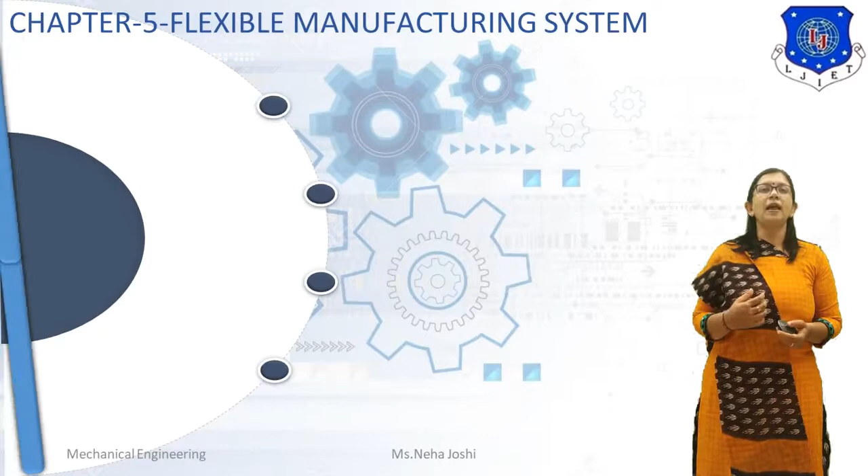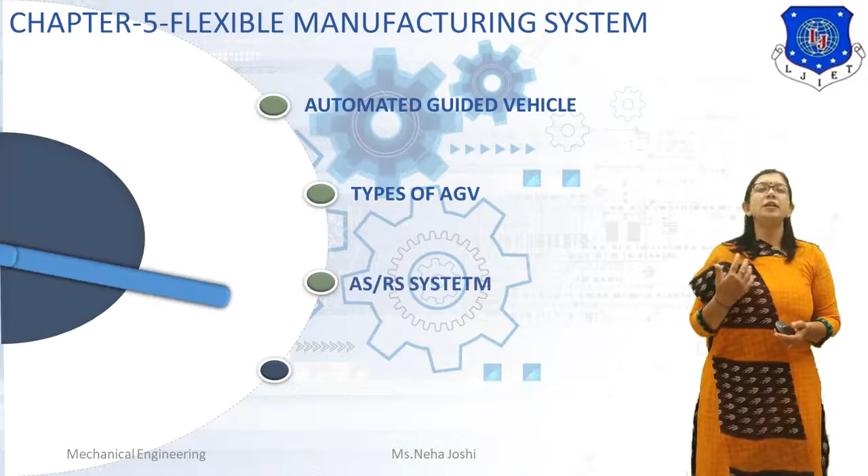Let's start our fifth chapter, that is Flexible Manufacturing System. In previous session, we covered different topics like advantages of flexible manufacturing system, limitation of flexible manufacturing system, then application of flexible manufacturing system, and workpiece handling in flexible manufacturing system. In today's session, we will cover different topics like automated guided vehicles, then types of automated guided vehicles, then ASRS system, which is known as automated storage and retrieval system, and advantages and limitation of ASRS system.

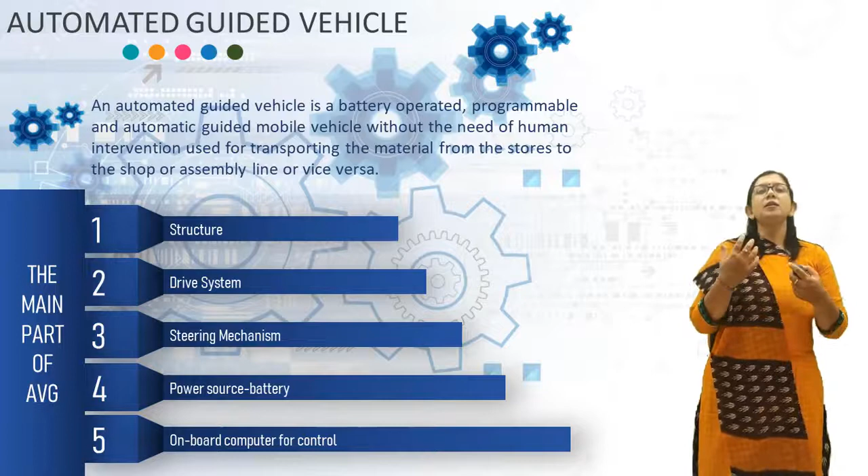Now student, first of all, what is automated guided vehicle? An automated guided vehicle is a battery operated programmable and automated guided mobile vehicle without the need of human intervention, used for transporting material from store to the shop or assembly line or vice versa. Such vehicles are equipped with an automatic guidance equipment, either electromagnetic or optical, and are capable of following the prescribed guide path and stop at location as per programming without the help of driver or an operator.

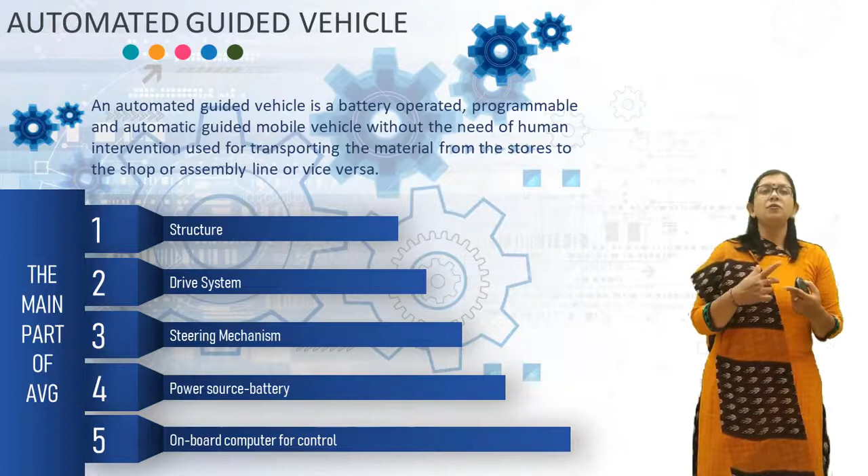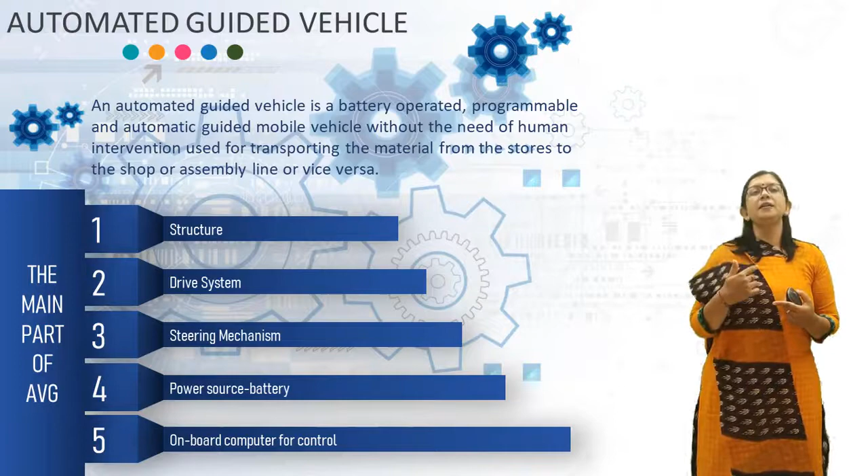Main parts of the automated guided vehicles are: first one is structure, second part is drive system, third part is steering mechanism, then power source battery, and last part is on-board computer for the control. Now here you can see how different kinds of automated guided vehicle transfer the material on shop floor. So this is the working of automated guided vehicle. There are several kinds of automated guided vehicles used in flexible manufacturing system.

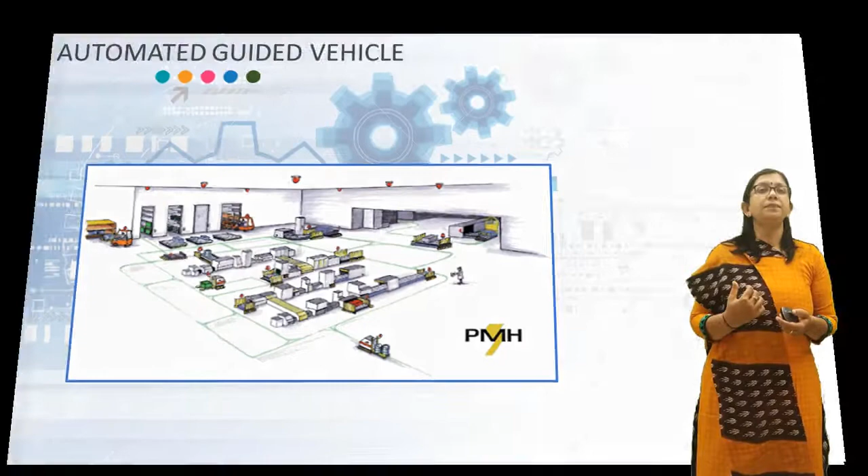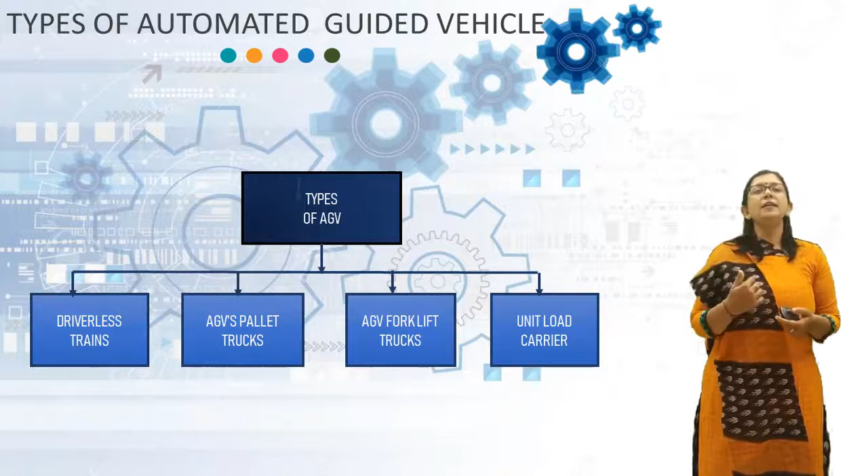Now we will discuss types of automated guided vehicles. There are four types of automated guided vehicles. First one is driverless train. The second one is AGV pallet truck. Third one is AGV forklift truck, and the last one is unit load carrier.

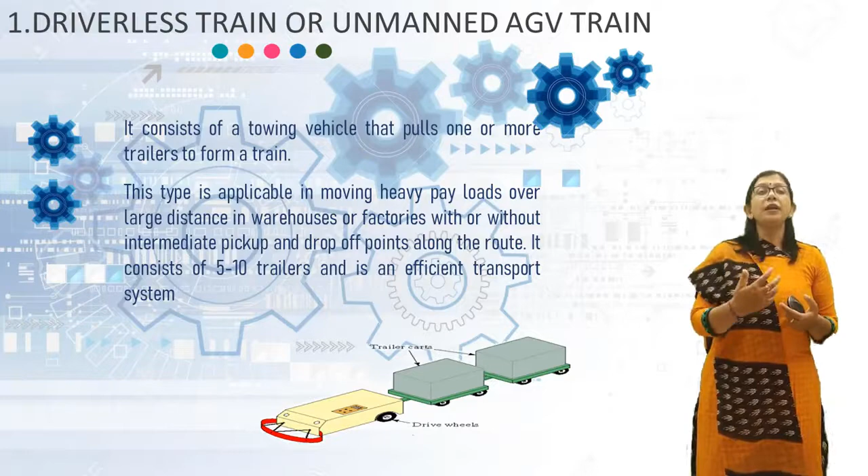Now first of all we will discuss about driverless or unmanned AGV train. It consists of a towing vehicle that pulls one or more trailers to form a train. This type is applicable in moving heavy payloads over a large distance in warehouses or factories with or without intermediate pickup and drop off points along the route. It consists of 5 to 10 trailers and is an efficient transport system.

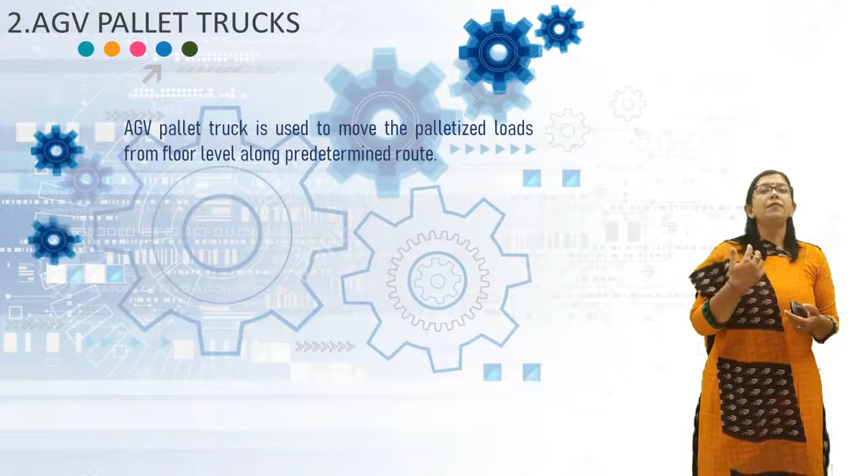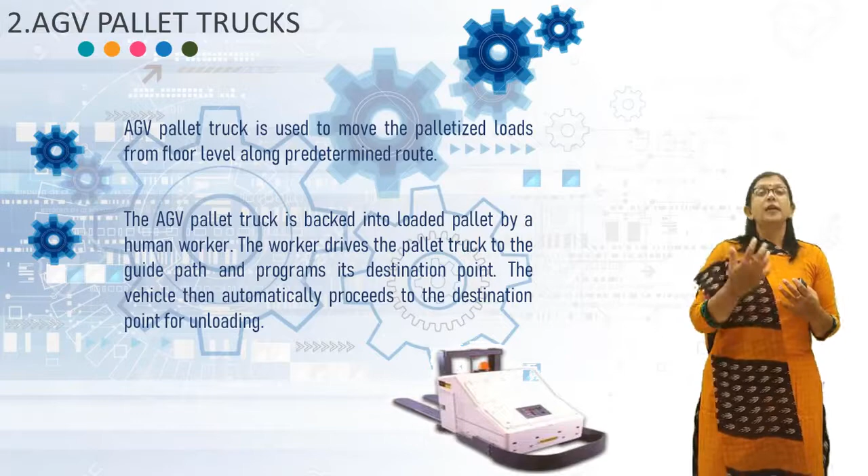Now second one is AGV pallet trucks. AGV pallet truck is used to move the palletized load from floor level along a predetermined route, as you can see in this diagram. The AGV pallet truck is backed into a loaded pallet by a human worker. The worker drives the pallet truck to the guide path and programs its destination point. The vehicle then automatically proceeds to the destination point for unloading. The capacity of AGV pallet truck ranges up to several tons.

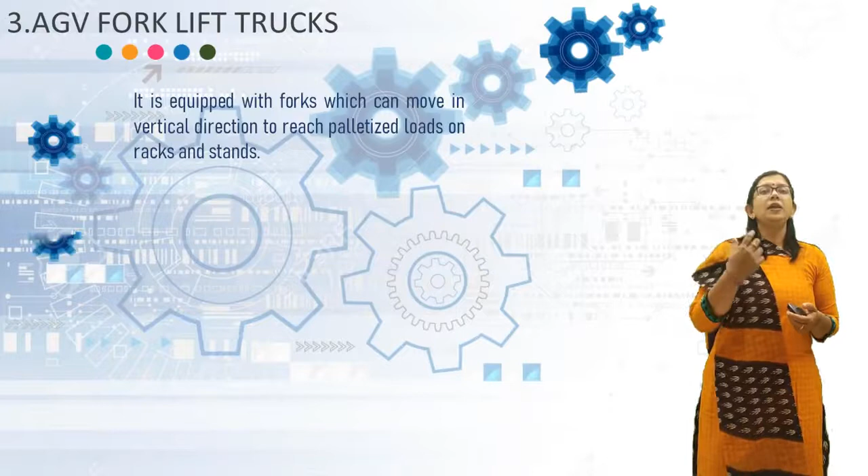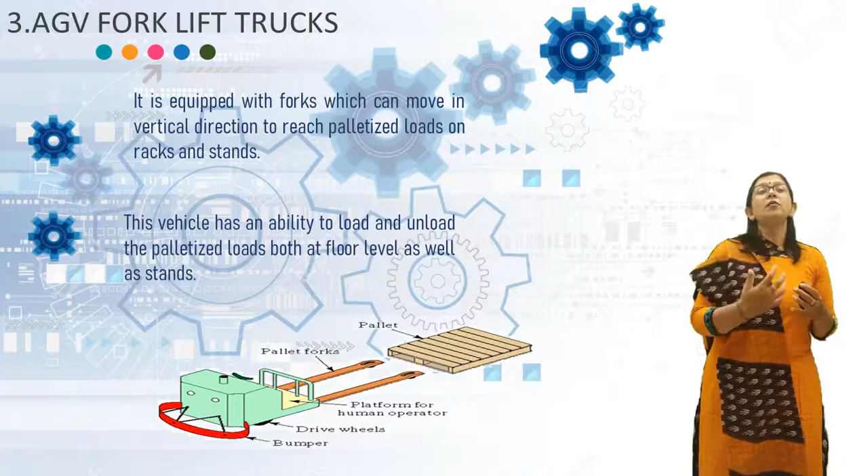The third type is AGV forklift. It is equipped with the fork which can move in vertical direction to reach the palletized load on racks and stands. This vehicle has an ability to load and unload the palletized load both at the floor level as well as stands. As you can see in the diagram, AGV forklift trucks, how it is used. It can position its fork at any height so that conveyors or load stands of varying height can be accessed easily.

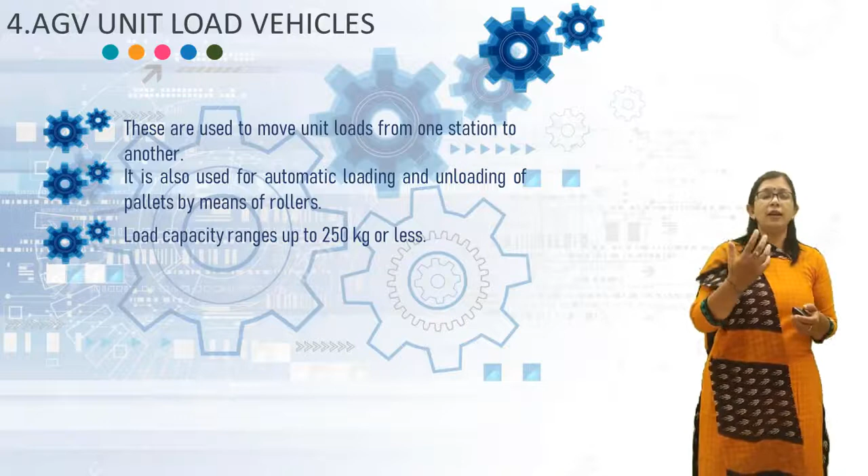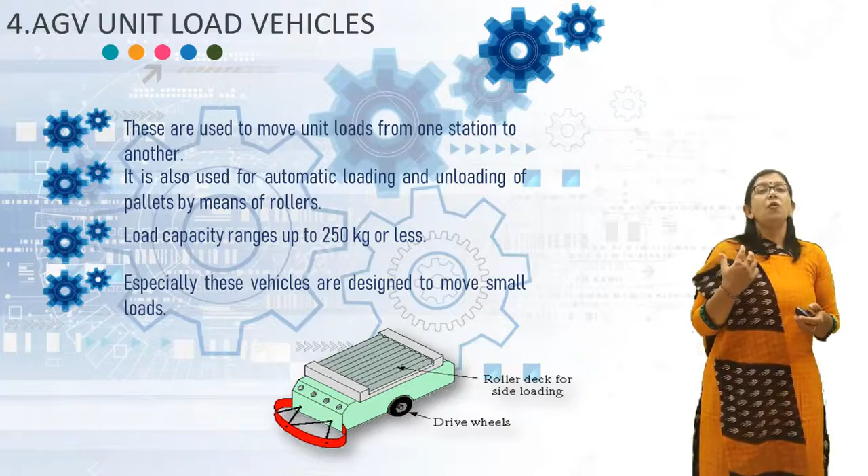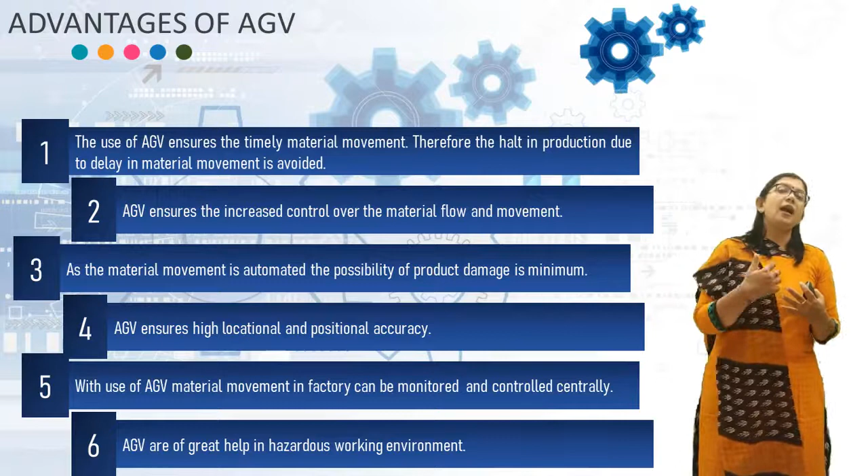Now we will discuss the advantages of automated guided vehicles. The use of AGV ensures timely material movement. Therefore, halt in the production due to the delay in material movement is avoided. The next advantage is AGV ensures increased control over the material flow and movement. As third advantage, as the material movement is automated, the possibility of product damage is minimum. The next advantage is AGV ensures high locational and positional accuracy. With the use of AGV, material movement in the factory can be monitored and controlled centrally. And the last advantage is AGVs are of great help in hazardous working environment.

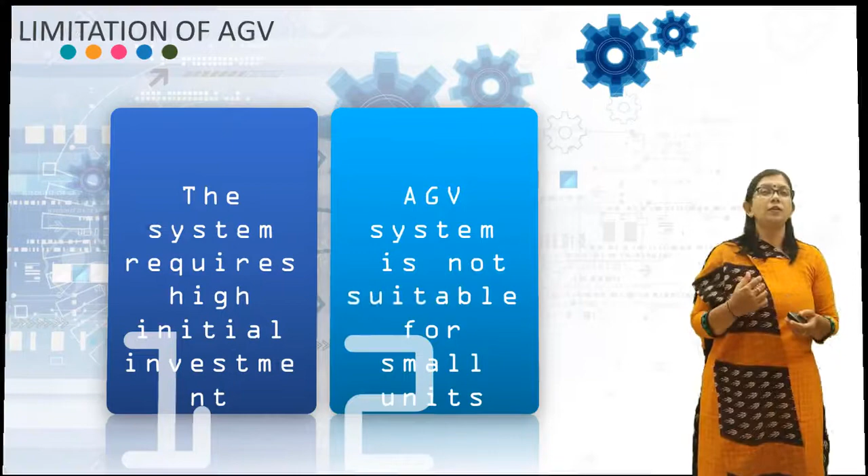Now, what are the limitations of automated guided vehicle? First limitation is the system requires high initial investment. And the next is AGV system is not suitable for small units. Now we will discuss about the ASRS system, which is known as Automated Storage and Retrieval System.

Now in large manufacturing industry, the volume of items and components is so large that it becomes extremely unreliable and time consuming to use a manual storage and retrieval system. Therefore, in such a case, it is advisable to use an automated storage and retrieval system. In an automated factory, as all functions of the factory are integrated and automated, the storage and retrieval system is also automated.

Automated storage and retrieval system can be defined as the computer controlled and automated system that performs the storage and retrieval operations with speed and accuracy. Automated storage and retrieval system can also sometimes be referred to as an automated warehouse. Now, automated storage and retrieval system handles, stores and retrieves the material faster with greater accuracy, safety, efficiency than the manual storage and retrieval system.

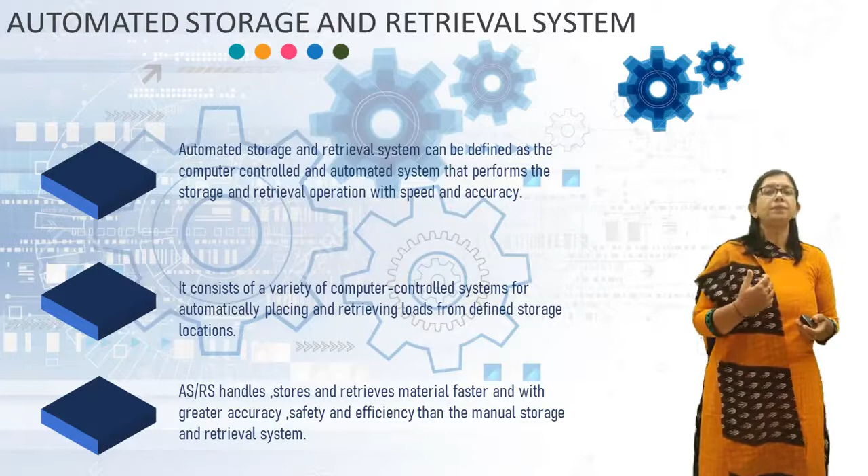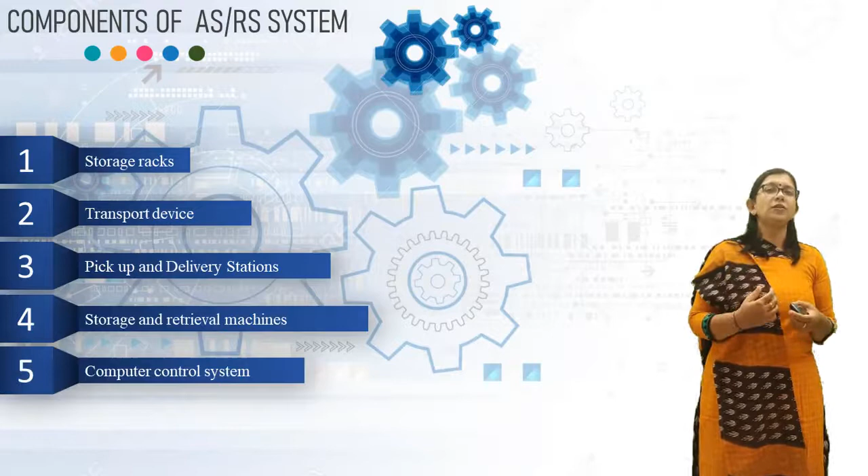Now, what are the components of ASRS system? There are different components which are used in automated storage and retrieval system. First one is storage rack or storage structure. This automated storage and retrieval system contains several rows of storage racks for storing the material items. The storage structure of automated storage and retrieval system is much taller, approximately 30 meters, than that of the conventional storage and retrieval system.

The next component is transport device. Okay. Generally, as a transport device, automated guided vehicles or conveyors are used. The storage structure where the material or items are stored is linked to the shop floor by transport devices like automated guided vehicles or conveyors.

The automated guided vehicles or conveyors are used for transporting the items between the shop floor and the automated storage and retrieval system. The incoming material items are first sorted and loaded to the pallets. The loaded pallets are then passed to the weighing and sizing station to ensure that they are within the load and size limit.

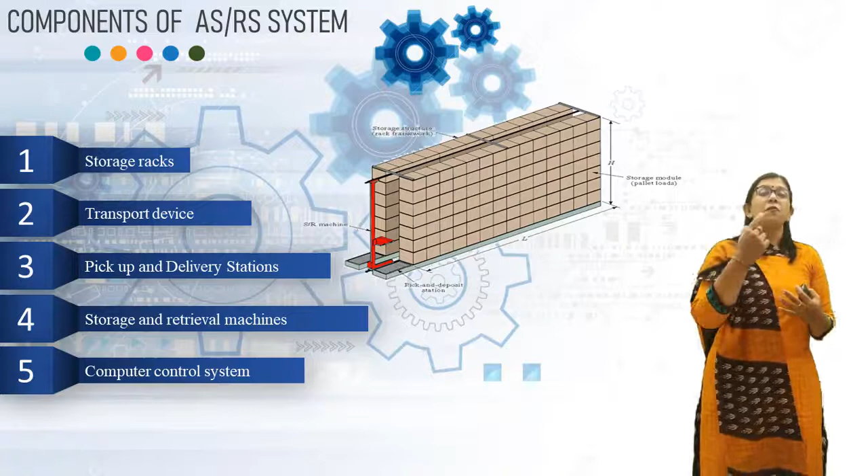And the last component of the ASRS system is the computer control unit. The computer control unit performs two functions. First one is to control the operation of the system, and the second one is to store the material movement and the inventory data. Now here in this diagram you can see how an automated warehouse works in a flexible manufacturing system. You can see the storage and retrieval system, how it works. Okay, then the different components of the automated storage and retrieval system.

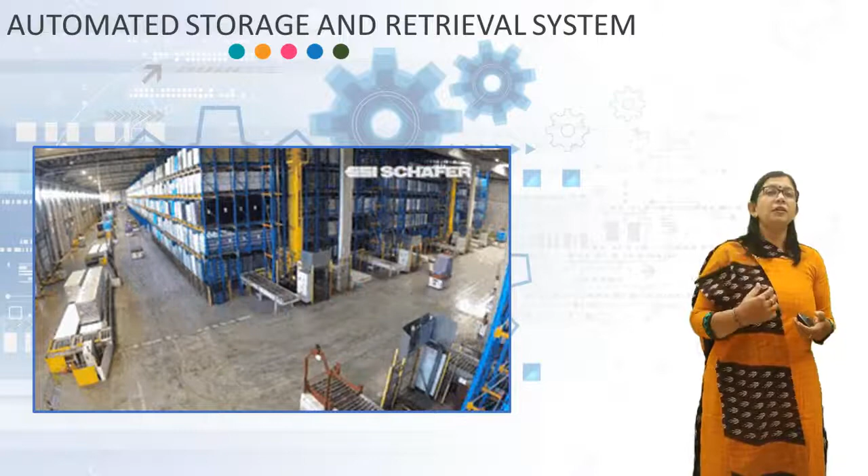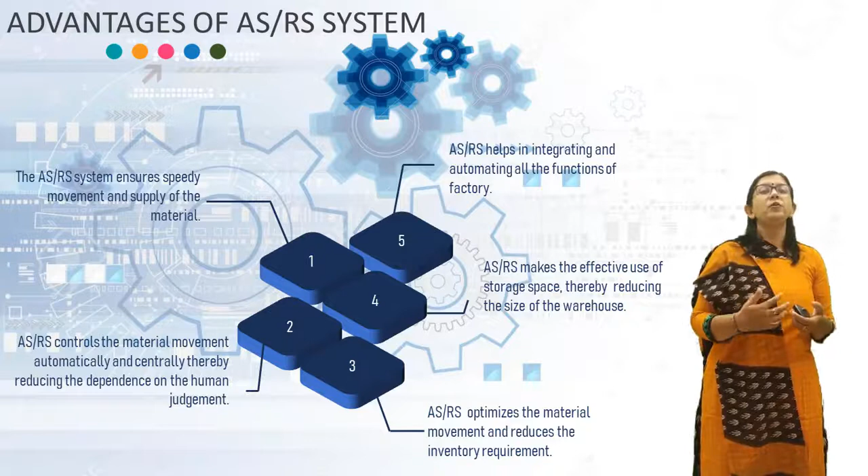Now, what are the advantages of ASRS system? The ASRS system ensures speedy movement and supply of material. The next advantage is ASRS controls the material movement automatically and centrally, thereby reducing the dependence on human judgment. The next advantage is ASRS optimizes the material movement and reduces the inventory requirement. The next advantage is ASRS makes effective use of storage space, thereby reducing the size of the warehouse. And the last advantage is it helps in integrating and automating all the functions of the factory.

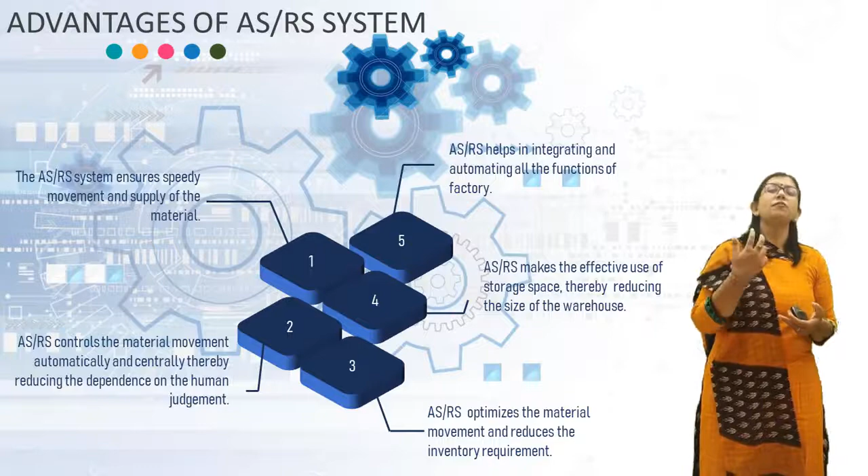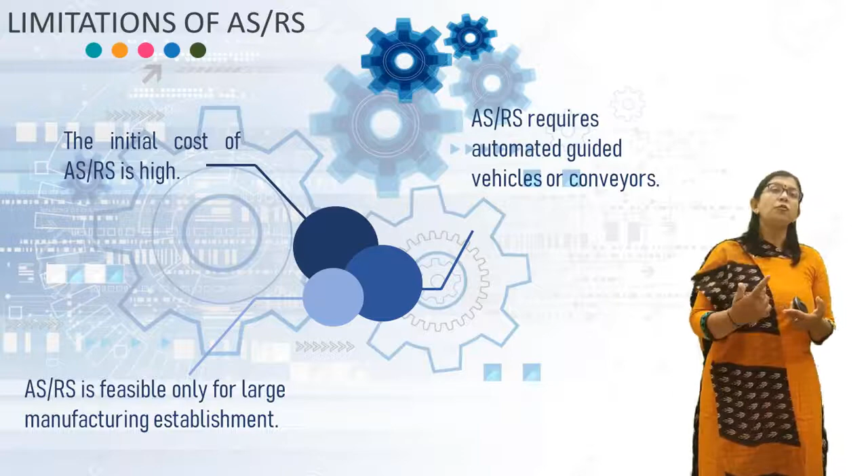Now, what are the limitations of ASRS? The initial cost of the ASRS is high. ASRS system requires automated guided vehicles or conveyors. And the last limitation is it is feasible only for large manufacturing establishments. So this is the lecture about the automated guided vehicle and automated storage and retrieval system, which are used in automation for the material movement and the storing of the material.